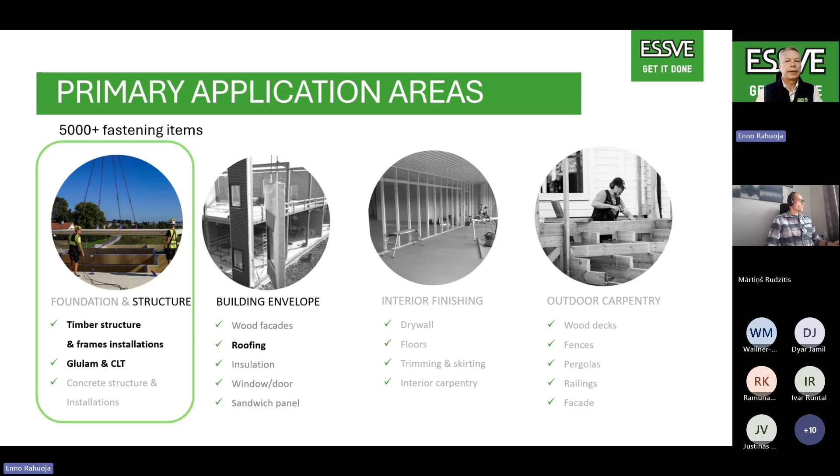Markus has been since 2013 a guest professor in Brookes University, Oxford. He's been an FH professor since 2020, and has deep knowledge and experience on fire and timber structural connections.

So I say just lightly, hello, Markus. Hello, nice to be here. Yes, super, I can hear you too.

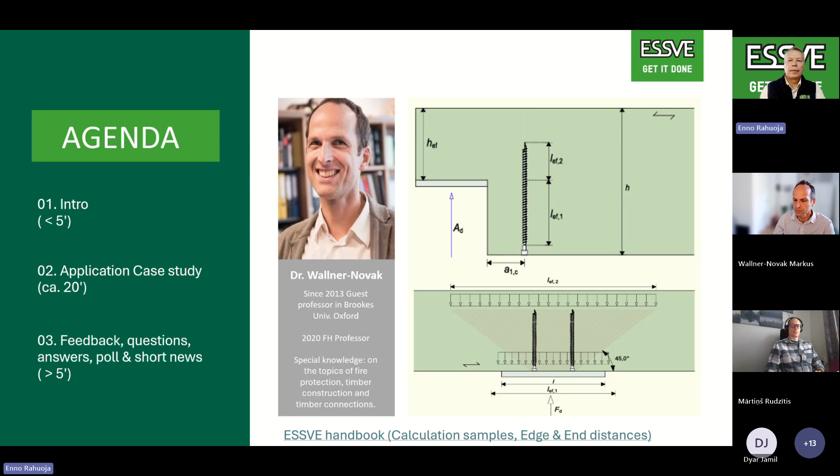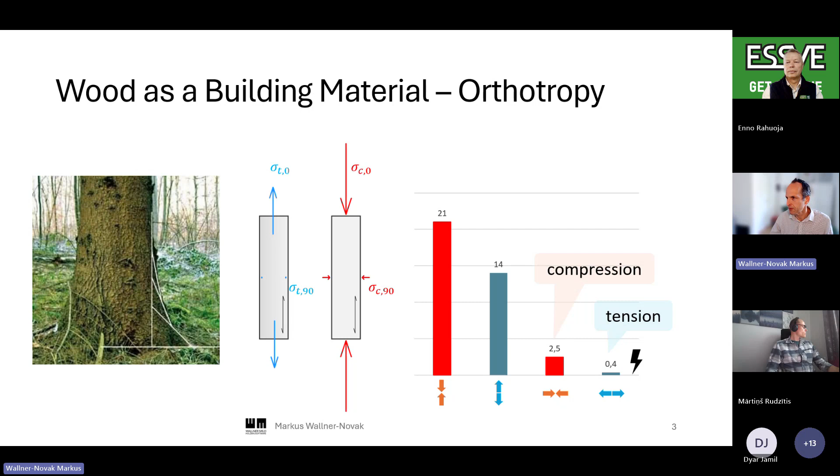So that's one principle we always have to have in mind when we use timber and construct with timber. The idea is, wherever there is a weak point, imagine having a crack, and then we add screws for reinforcement to avoid this crack and to transfer the loads, like in this notch example here.

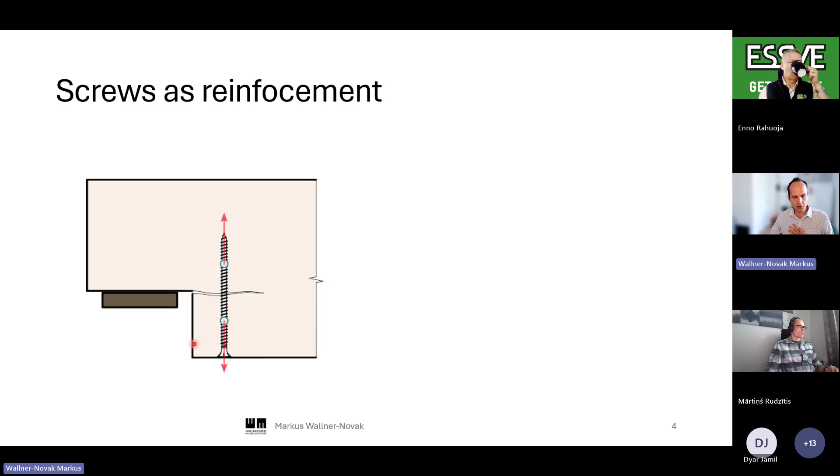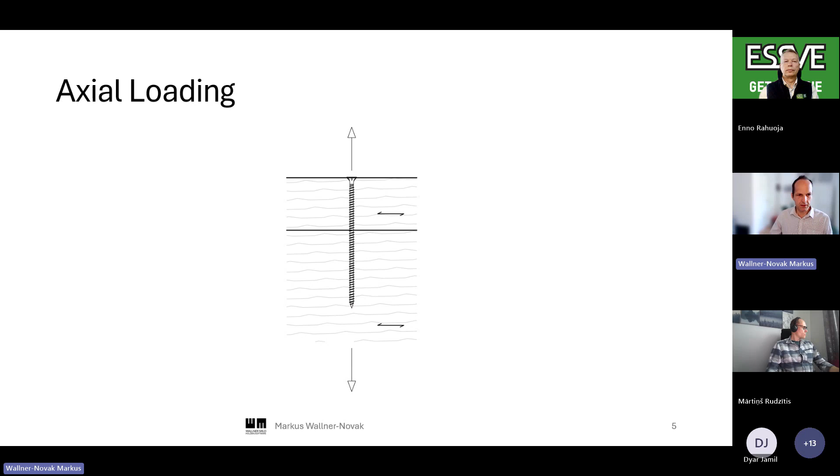And so if screws are loaded axially, they are very stiff. The development and the optimization was long going on, and now ESSVE has very optimized screws for self-drilling, and also the thread geometry and everything is pretty much optimized for as low torque as possible, but as high tension capacity as possible.

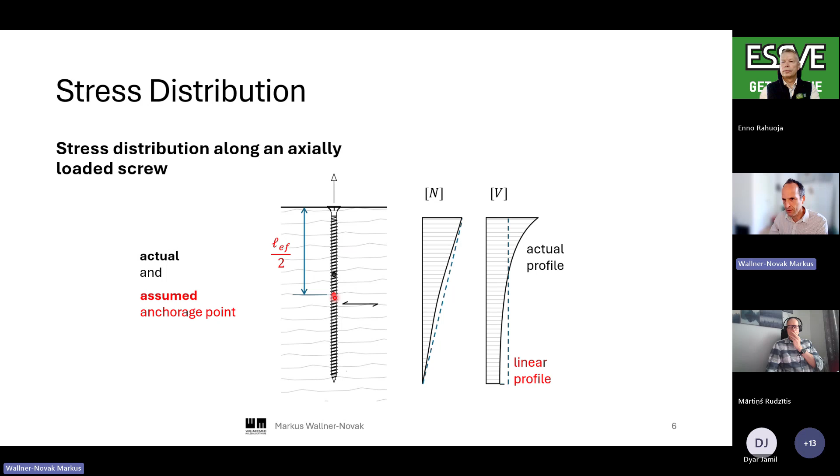And so the engineer's model usually is that for the realistic load transfer, how the shear is transferred from the screw to the wood is not really linear, but we assume that at half of the thread is the anchorage point. So this is an engineering model that we sometimes use if we look at the screws in detail. It's like a little truss. In the center point is the anchor point, and as the stiffness for transverse loading is relatively low, only 1/10 of the actual stiffness, we usually use this pendulum bar as a model.

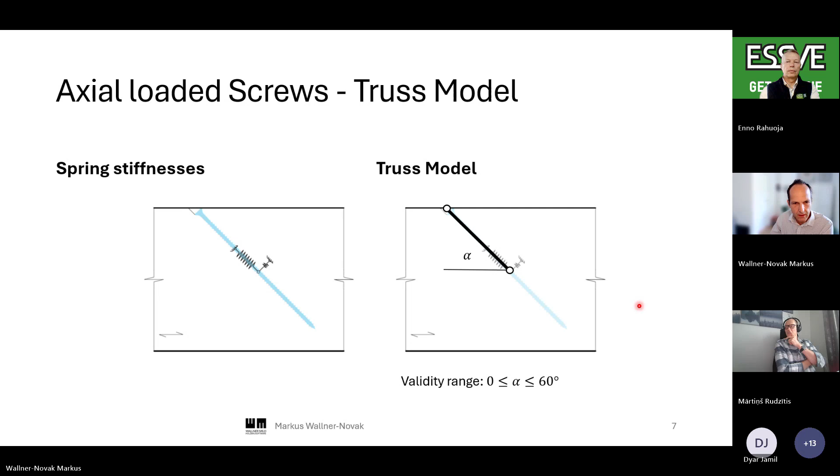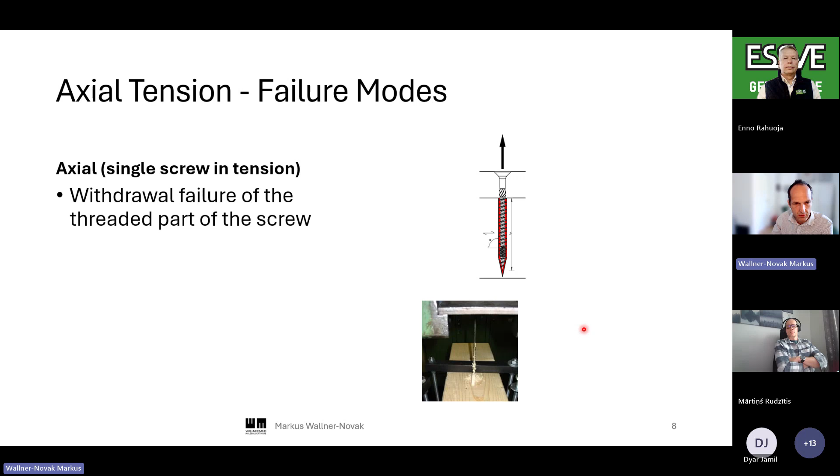And what can happen? It's also an engineering task to ask what happens before it really happens, and then we design so that it doesn't occur. One thing can be that the screw is torn out completely, so the thread is withdrawn. Then we can have the head pull through. That depends on the application. It's not really important in cases where we have two threads in two different members of wood, but sometimes if the member is not wide enough, then we have this case.

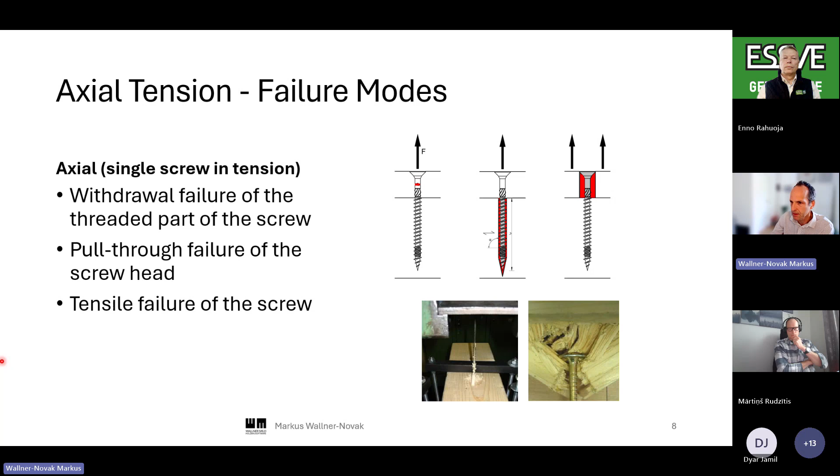And usually it's not really governing, but we can have a tensile failure of the screw as well. It's usually near the head, because there we had the most shape-changing parts in the production. So if it breaks, it would usually break somewhere here. So this we know now as a basis.

And then there is another thing that we have to consider sometimes, which might be interesting for the supports: the buckling of the screws. They are usually embedded in timber, so this is quite a good situation for the buckling lengths. It's not really a high buckling problem, but we have to consider it, and that's another design check that we have to do. So these are pretty much the basics of the screws in a quick run, besides the optimization of all the geometry and the tip and so on.

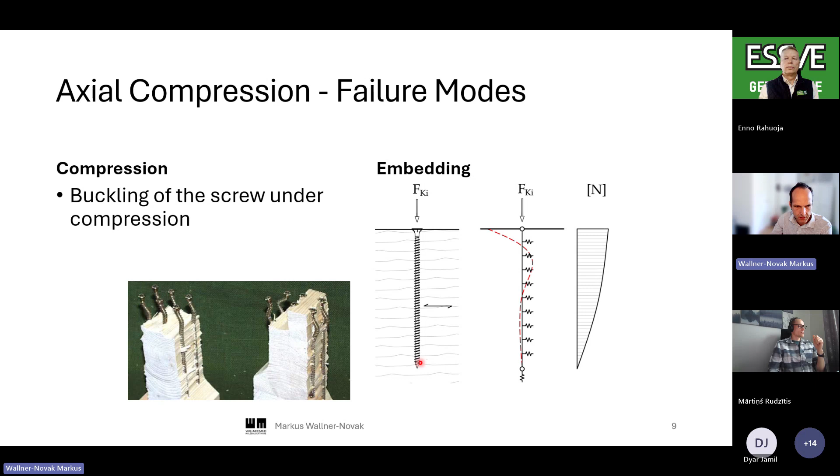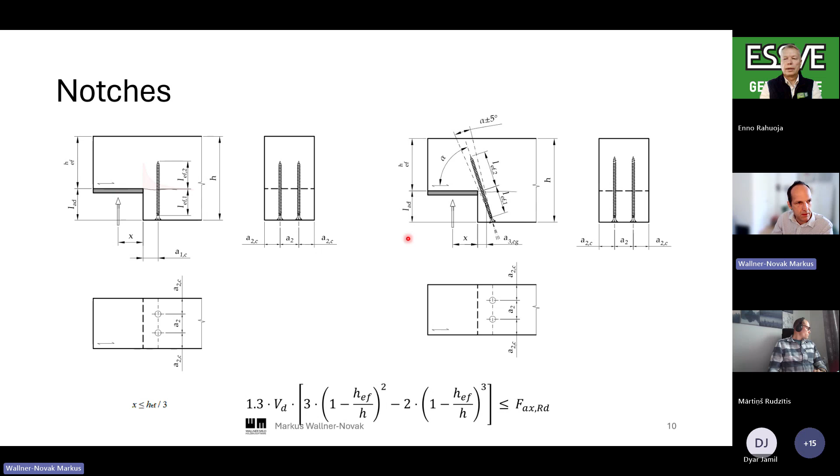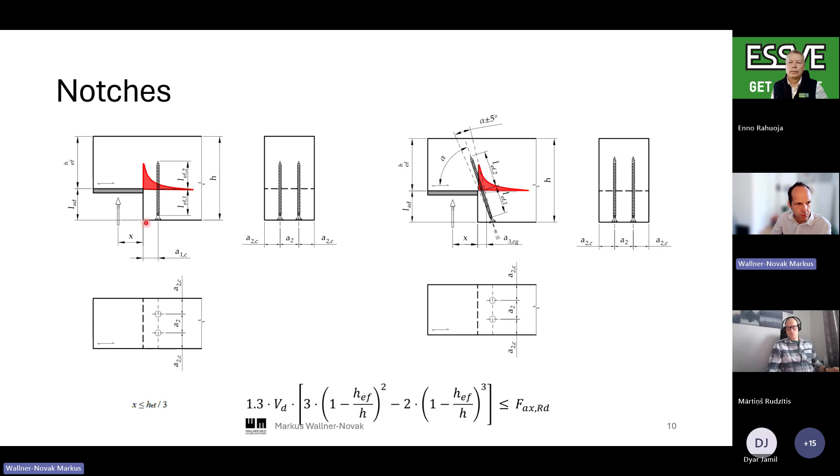And in some cases, as the stresses are very nonlinear, we might also use inclined screws at the right side. That's a little more difficult to produce, and it's sometimes better to use a cylindrical head here, as we discussed yesterday, for the visual impact and the little damage the screw head does to the wood. But it can be even better for the structural behavior with very high loads, because the crack stresses are very high at the starting point and then decrease rather quickly. But usually the application is this one, and the distance is kept as close to the end grain as possible. That's our main distance here.

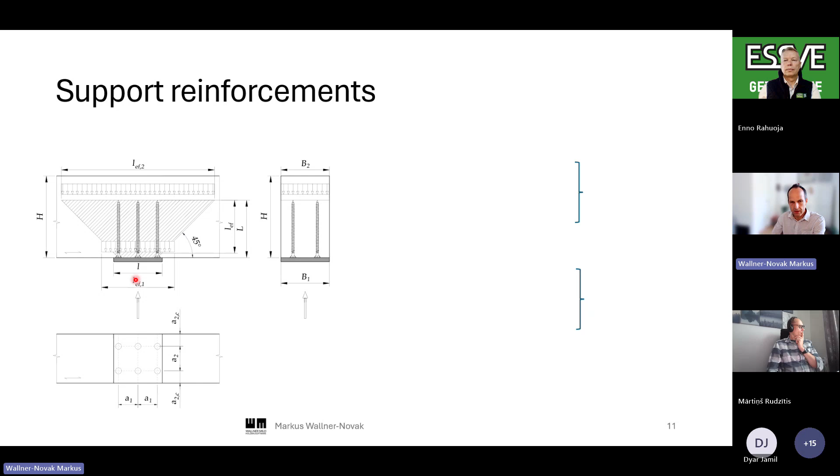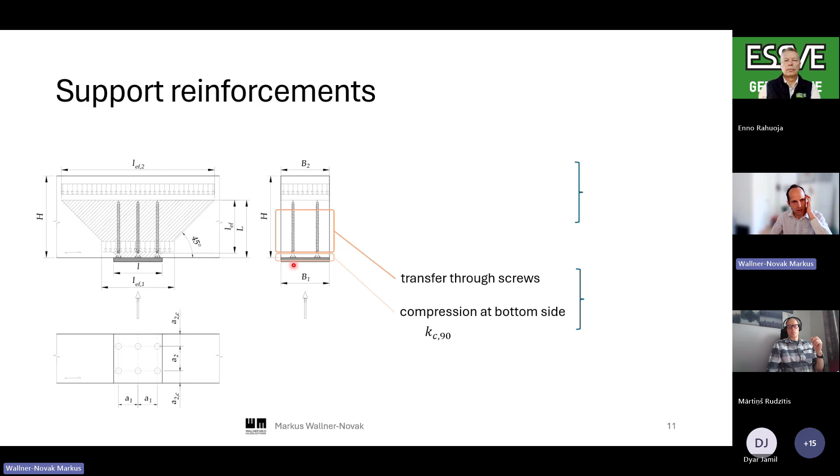And if we have a look at the engineering design check chain, first the load has to be checked without screws at the compression from the load bearing, then we transfer the loads through the screws inside the wood, and finally we check the design at the screw tip, and whichever of these two is smaller governs the design.

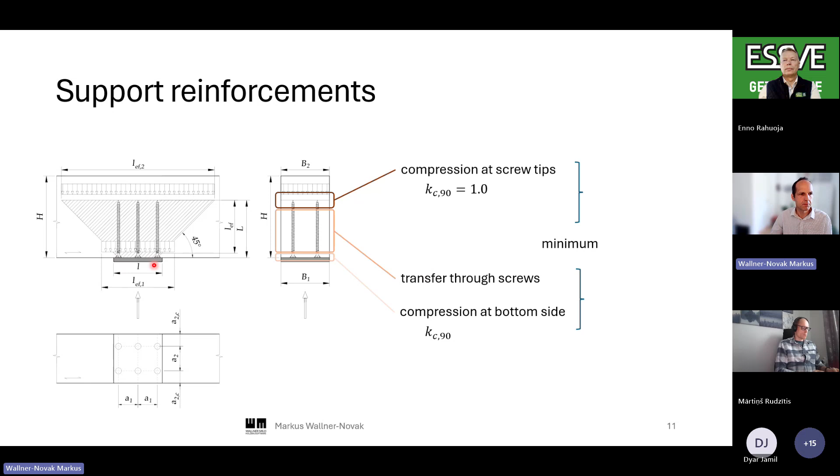And the screw plate here is just touching the heads, because the compressive force should be transferred equally to all screws. That's the reason there is a plate, so the screw heads should be within +/- 1 millimeter position, and then the plate helps transfer the load up. Only for position securing there might be a very small screw, or the plate could be sunken in for fire protection, so that the position is fixed. It's just a positioning thing, but otherwise it's just contact here.

And I will show 2 examples in a few minutes, one notch and one support where we can also use cylinder head screws. And a different situation is the end support. Then you don't have the full spread of the load up to the tip, but a limited one because the end grain is here.

And also a provision: if we have compression and want to transfer load into the wood, it's about 20 or 30 times the diameter to transfer the load in. If it's longer, it doesn't work anymore because the buckling of the screw governs. So you can keep in mind that 30 times the diameter is a good length for screwing compression.

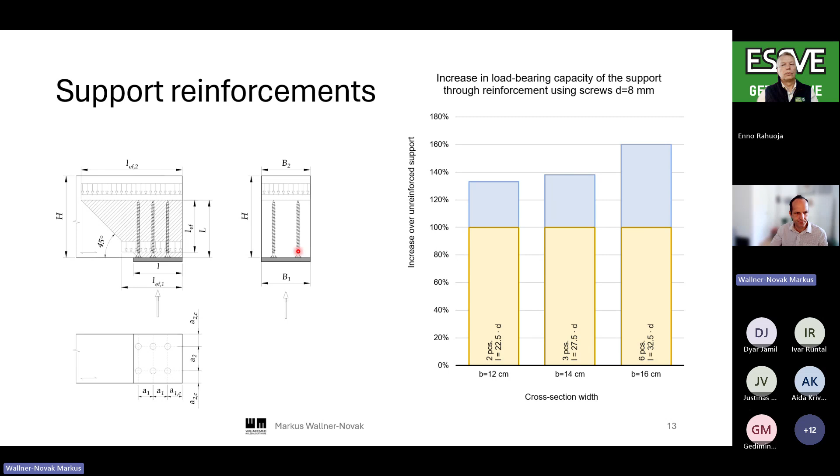And then one final thing about the spacing. You can look it up in the ETA. In the European Technical Approval document you will see that the distances are much smaller than in the Eurocode, and that often helps in designing screws and providing a good engineering solution, because if you can pack them more densely, it helps increase the capacity.

So this was the theory, and to come into practice, I want to show you the design examples we discussed. We have this Excel solution for the screws, and I start with the notch. We want a beam that's 32 centimeters in height, and we do a notch that's half the height, so 16 centimeters.

I tested it before. We can try with 20 kilonewtons reaction force on this side, and with this geometry the program calculates that 13 kilonewtons have to be transferred by this crack. As engineers you might think that the shear in the lower part has to be moved up to the upper part, so the shear stress is summed up at the crack, but that's not enough because you have this non-linear crack geometry and cracking stress.

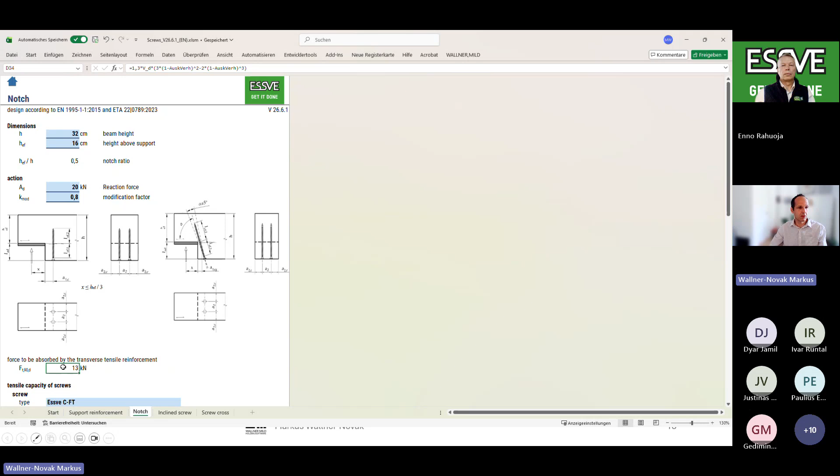So it's higher: 13 kilonewtons, while the reaction force is 20. It's higher than the sole shear, which would be 10 kilonewtons if we split the cross section in half. And then we can select a screw. We have all different geometries and variants. I stay with this one, with the cylindric head, and I can use about 280, and then we can check if this geometry is good.

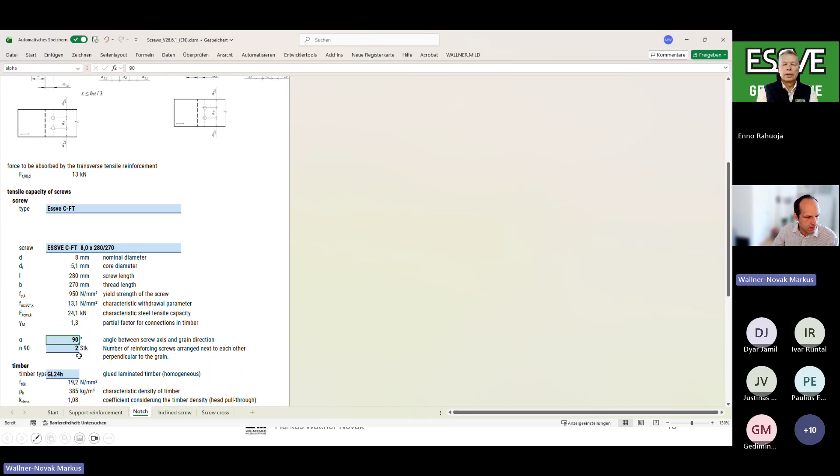The angle, as we said, usually it's 90 degrees, and timber is glulam. And the screw position we could change, sometimes for fire reasons and sometimes for visual reasons, or if the beam is very high, we can sometimes sink it in. We have a countersunk screw. We could set this here, and then the program calculates what's the effective length in part 1.

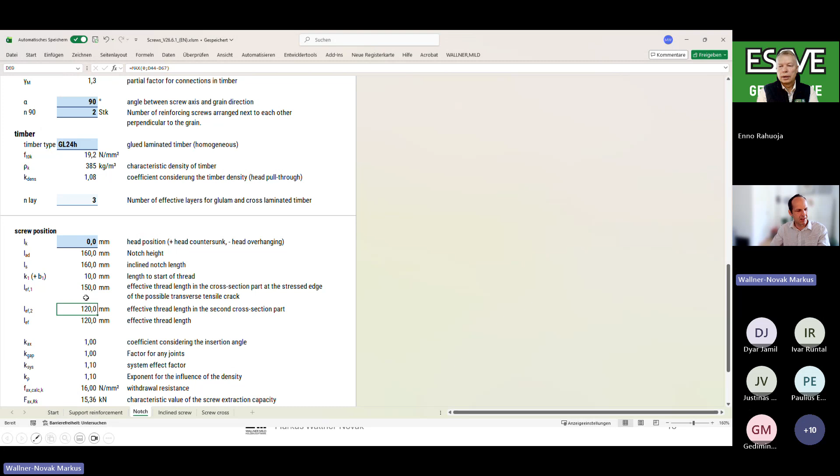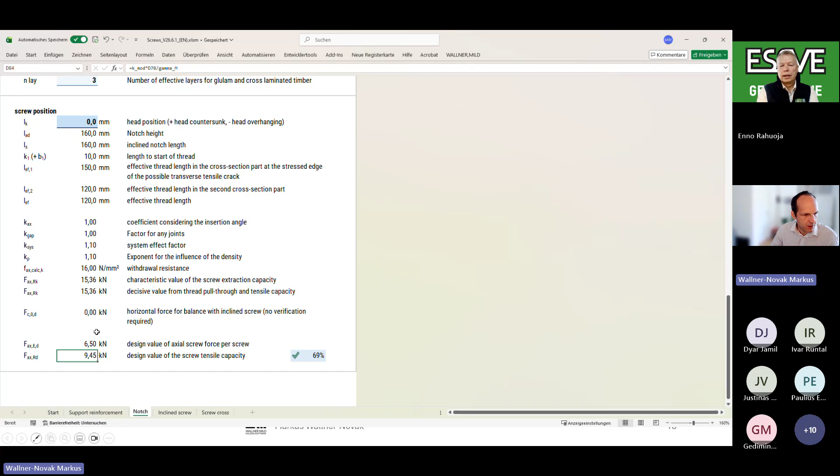That's the lower bit below the crack and above the crack. So we have these two lengths. We could do a little bit longer if we need, but we see that 69% is the factor. So we are safe, and we get the design capacity quite well.

And the second example is the support reinforcement. I also have just entered the dimensions first. 16 by 32 centimeters glulam beam, and now we have much higher force. I go up to 150 kilonewtons, to show what the capacity is, and we get here, if you have a look, the compressive strength without reinforcement would be 152%

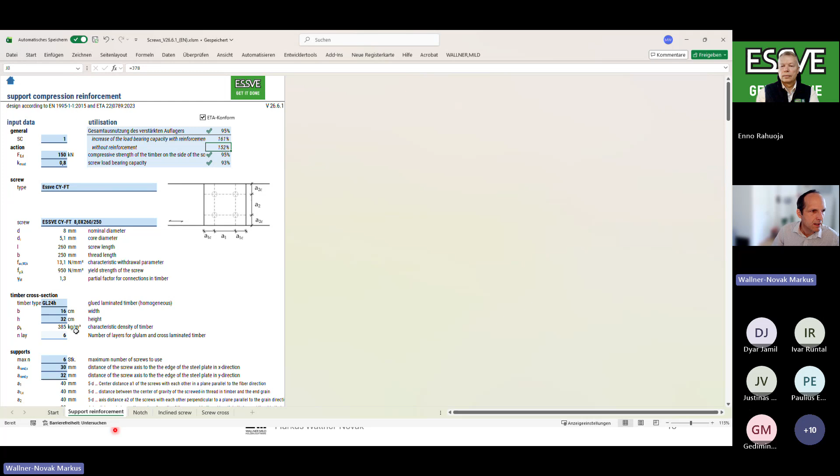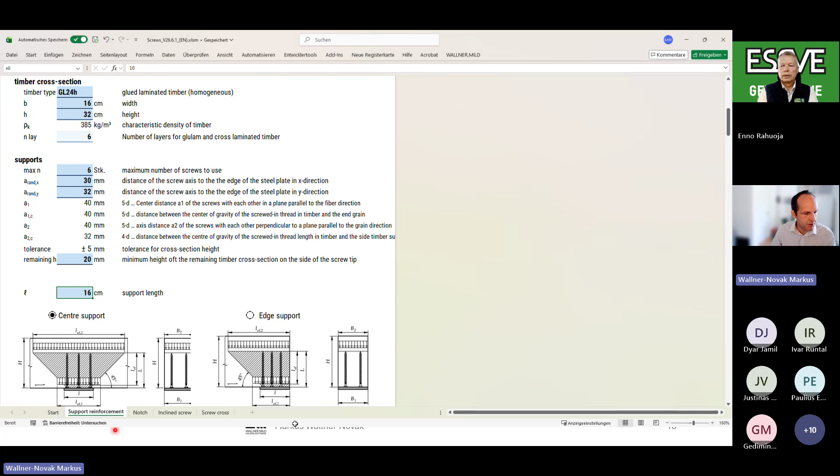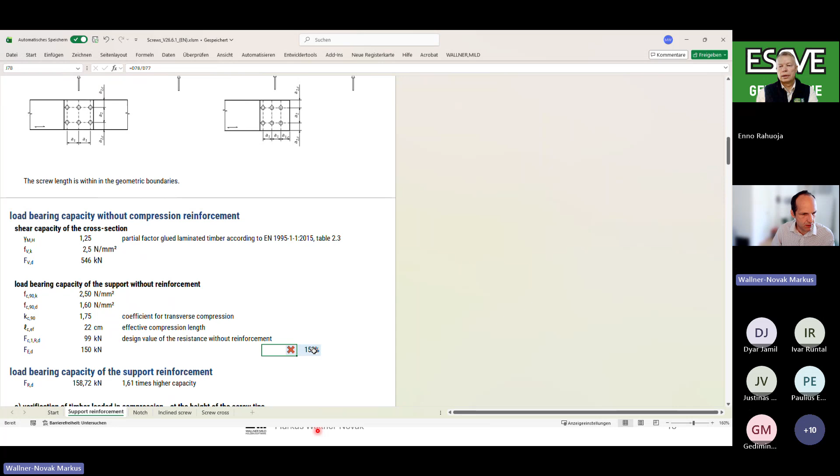overstressed. So if we add screws to the support, we can enter the support length here. So if we assume that the column where the beam is positioned on is 16 by 16, then we have 16 centimeters support length, and the program then checks the shear capacity of the cross section, and then the capacity of the support without any measures. It's overstressed. And then by using the screws, the program calculates the minimum number.

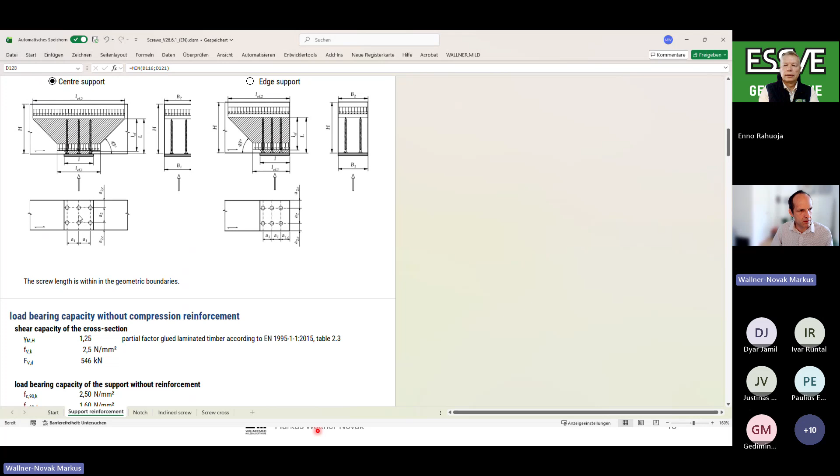It's 5, so there's a sketch up here. Instead of 6 in this sketch, you could just use 5. That looks like a 5 on a dice. So we have 2 here, and then just 1 in the center. By using 5 screws, diameter 8 millimeters that were set up here, and 260 in length, then the capacity is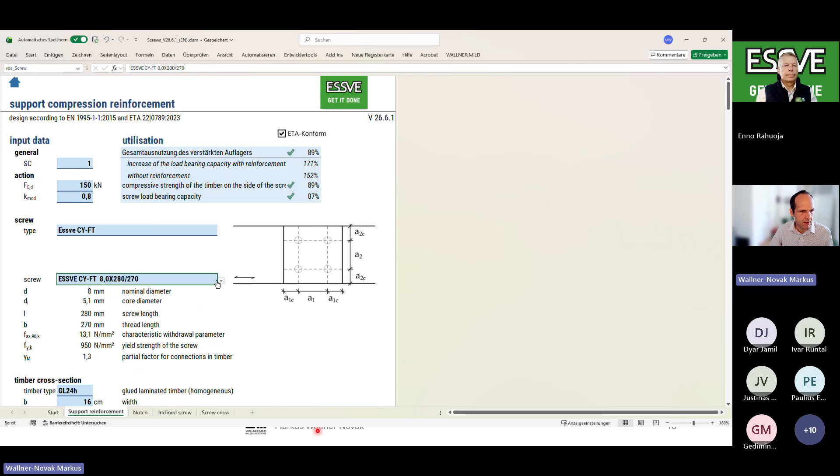reached. If the screws are shorter, the capacity will probably not be reached, because then the transfer to the tips is not enough, and we have to increase the length to about 260, 270. And if we go much longer, it doesn't pay off, because then it goes through the beam, but the buckling then governs. So usually the length is limited at some point.

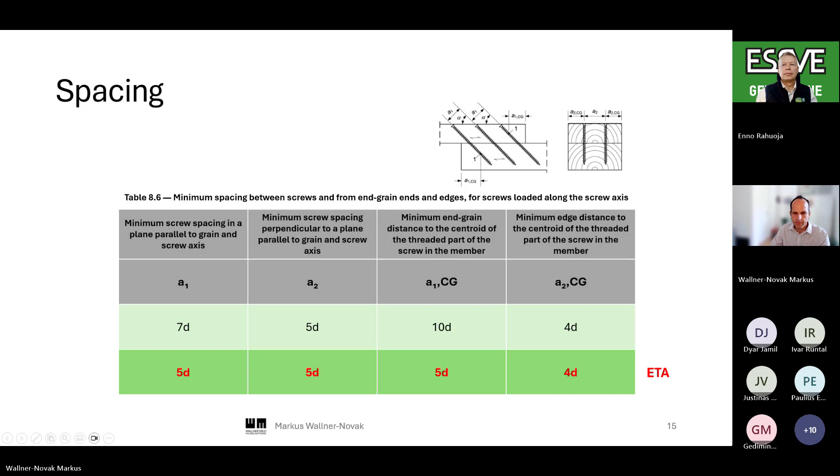Yes, so I hope I didn't overstretch time. Sorry, let's go back to the slide here. These are the two examples in quite a quick run through, but I think that's the 20 minutes we wanted to use to give you a short overview. And it's always an engineering thing. If you have to deal with the problem, there might be some more questions, and we are ready to answer them right away, and otherwise on request, Enno will be there to help you out. Yes, so this is my overview.

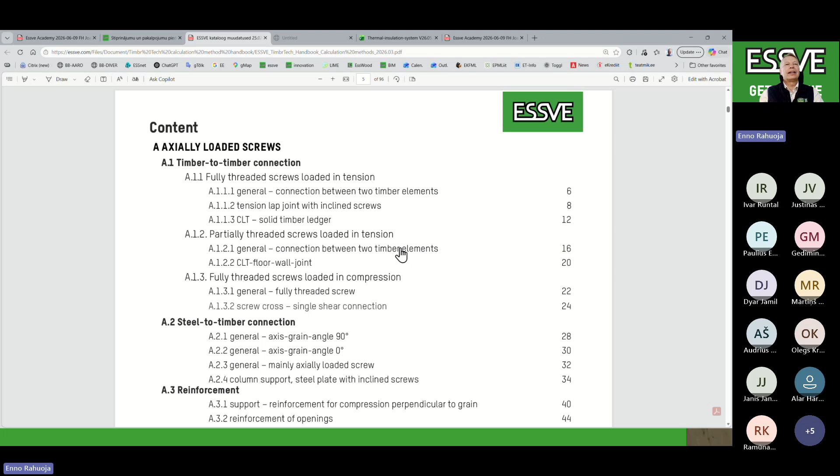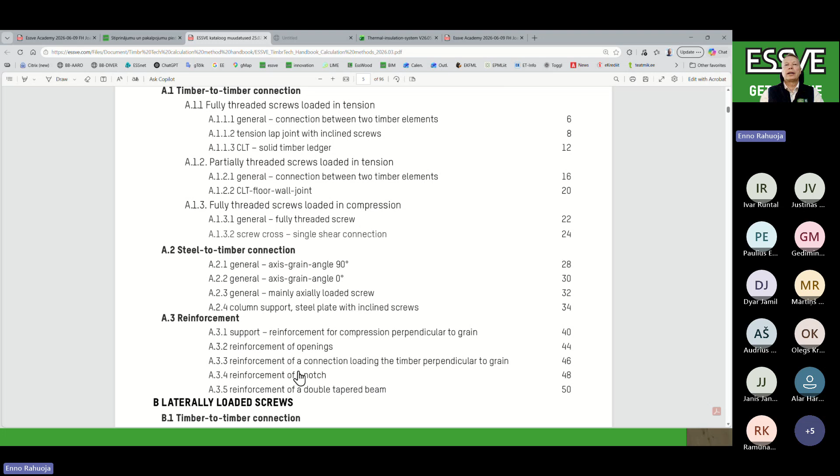If I click up here on that calculation which Markus mentioned, the theoretical background, then go to content page number 5. It's uploading, it doesn't come up quickly here. But here you will find the content lines, related to the pages. For example, the notch is on page 48, and page 40 was the support. So if you click on 48, you will find the theoretical background, how to calculate it, and here is the model of the calculation to get the result.

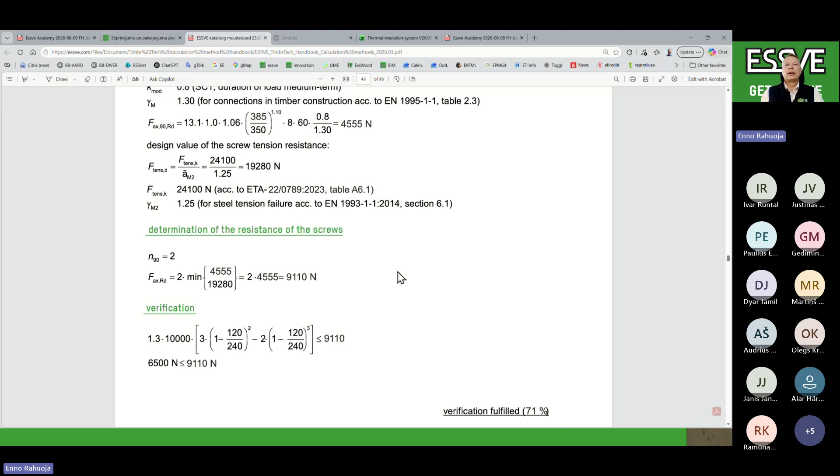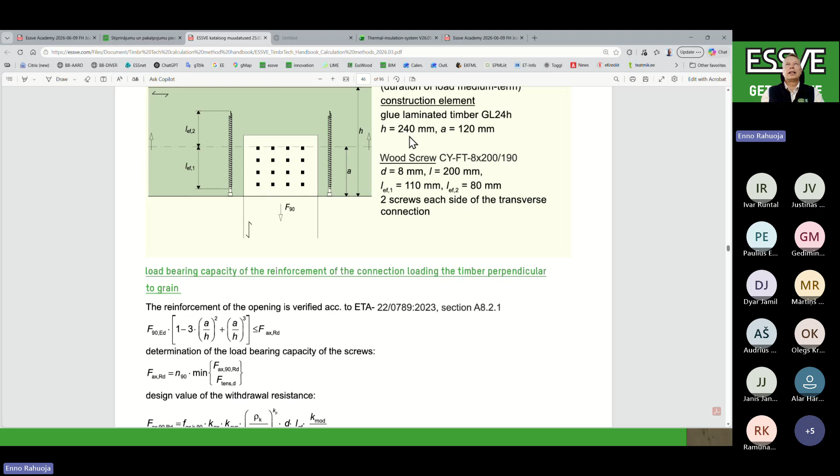So here are practical tips and samples, and you will find similar ones for other reinforcement applications as well. But as the internet is lagging a bit, I'm not going to spend time here, but that's just a tip for you.